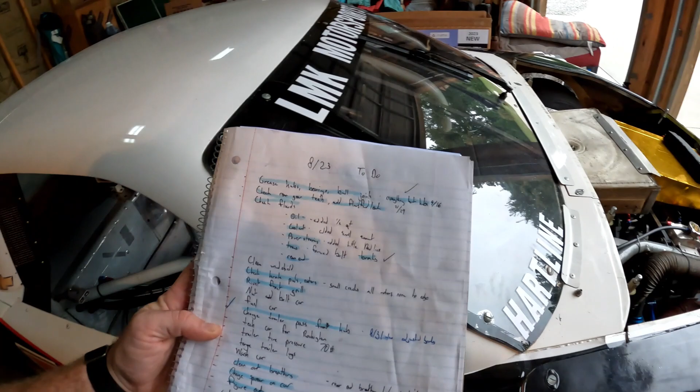Showcasing what I was talking about, getting the car ready to take it to Rockingham next month. Now, I usually keep a notebook of everything I want to do with the car—my honey-do list, my faults list. Anything I want to do to keep it in tip-top shape, or any issues I come across, I write down here. That way I don't forget about them, and I can just scratch them off whenever I get them done. So I'll run you through this list real quick.

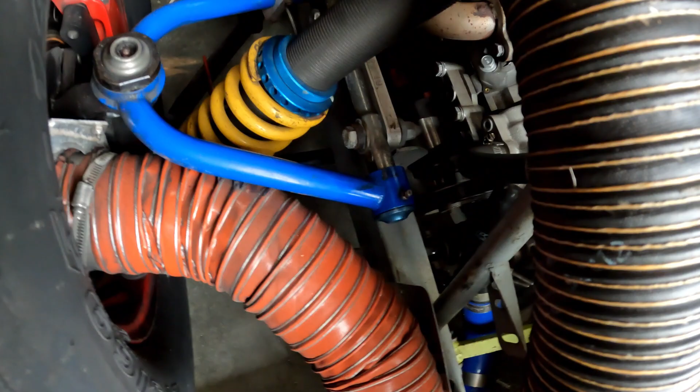Greasing hubs, bearings, everything like that—some of those I can show you. It has control arms, you can see the little grease points up there. So greasing all of those on both sides of the car, using Mobil 1 synthetic grease, putting it in there just till I see some of the old grease coming out, replacing it with new grease. Some other points underneath the car, the drive shaft, anything like that—just checking the whole car for grease points. Like I said, it's only a month old to me, so I'm still finding things, but as I come across them, I'm greasing them. Check the rear gear teeth, wanted to see what kind.

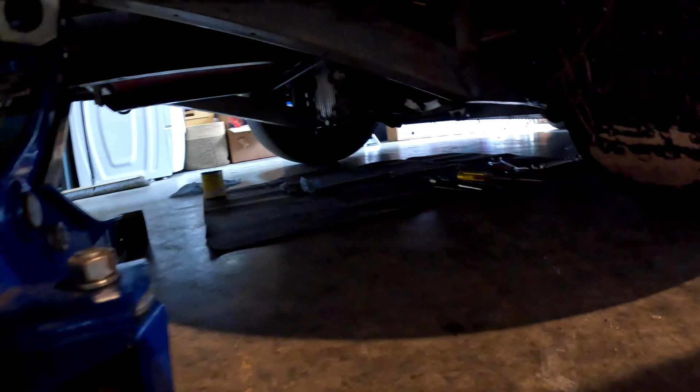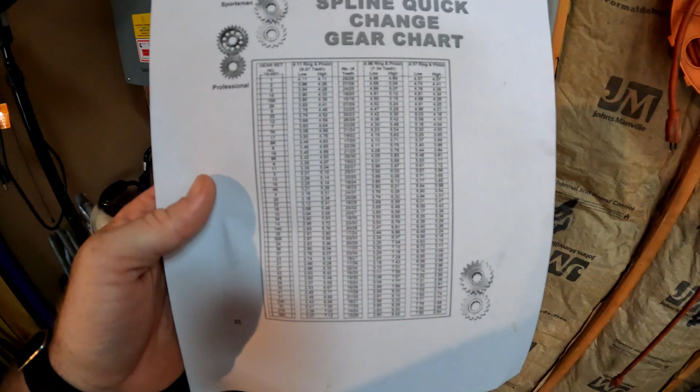Tiger has a sheet on their website where you can check your gearing depending on your ring and pinion. You can see your gear in there—this has a 21-29 gear set in it. You can change those out. Anybody familiar with the quick change rear gear will know that.

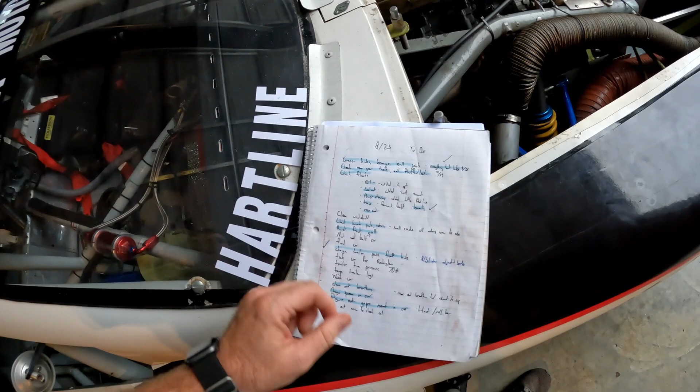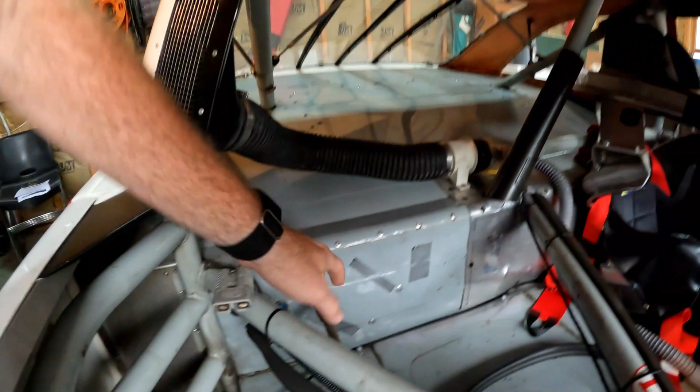Checking fluids, oil—that was kind of one of the things I noticed. The oil reservoir on this car is back there, behind the passenger side rear tire, kind of hard to get to. You measure the quantity by sticking a measuring tape down in there to see how much oil is in there—should be about 7 to 8 inches from the top. Really hard to get to. So one of the things I noticed, and put on my list, is cutting out an area to check the oil. I'm going to measure it out, cut a square, rivet a hinge and a latch to it. Then you'll just be able to pop that, take the top off the oil, and check it easier instead of taking the tire off and snaking something down in there.

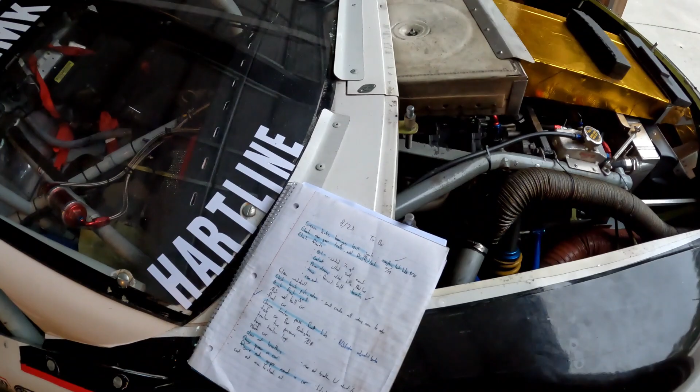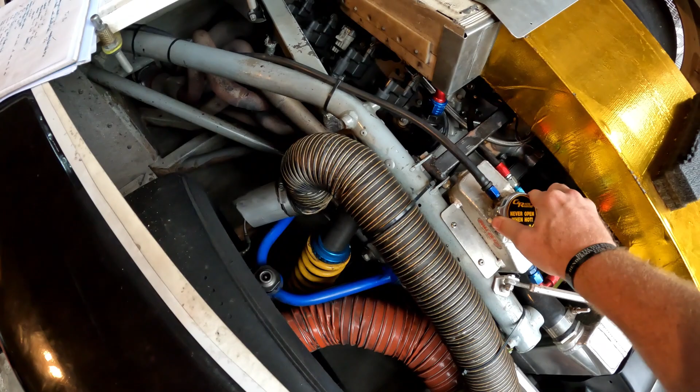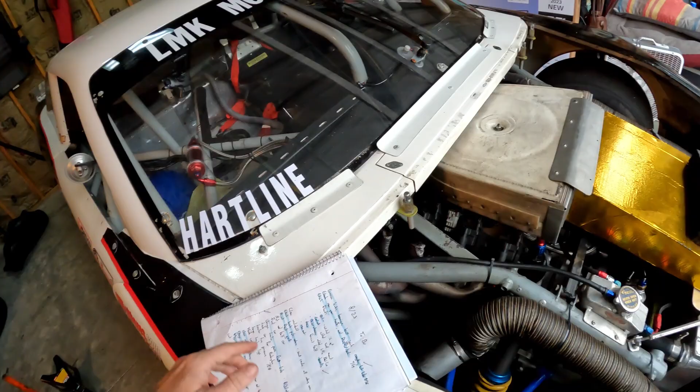Coolant, it's right here. When I add distilled water to it, here's your blow off—if it gets too hot, too much pressure, it'll vent it out there. Put this back on. That'll actually vent out right here by the windshield, so one, you can see it, and two, it's not going to put that water underneath your tire and reduce some of your traction.

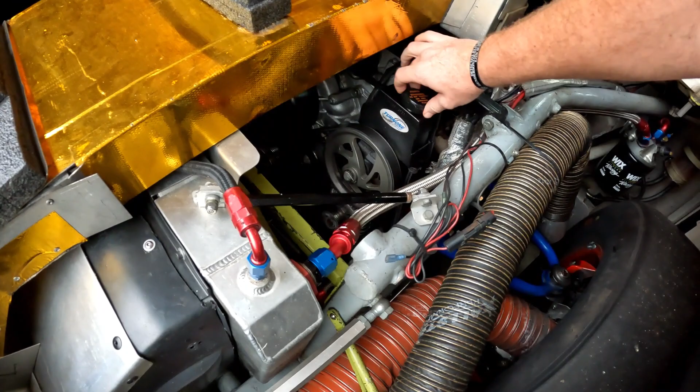Power steering, like I said earlier, has a Turn 1 power steering. Put some Redline in there, added just a little bit. It's really simple, just check your fluid level on there.

The trans has that Jerico. The car's not up off the ground anymore, but it has a fill bolt and a drain bolt—really simple, take the fill bolt out and you can check the level from there on the side of the transmission. Just kind of hard to get to up underneath the car since it sits really low to the ground. I got some of the weight taken off back there just so I could show you the rear end, but the tire is still on the ground—you can see how low it sits.

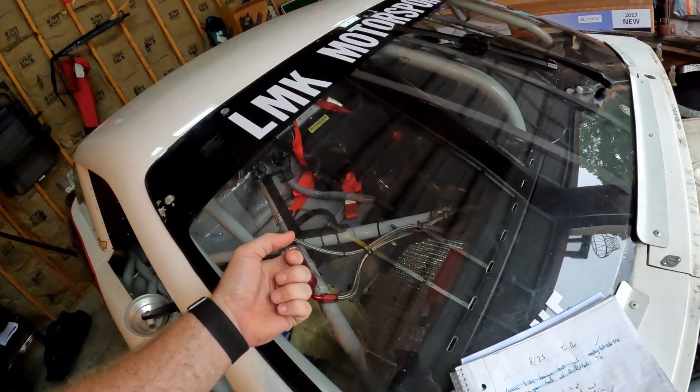And the rear end—clean the windshield, you'll notice that one's not checked off yet. This is plastic, not glass, so you can't put regular glass cleaner on it. I got some 5-star glass cleaner, plastic cleaner, windshield cleaner from the company that makes this. It's in the trailer, I'll show you that one.

Check all the brake pads and rotors—fairly simple, you take your wheels and tires off and check the rotors. They've got a little bit of cracking in them, that's normal from the heat. When the cracks get towards the edge of the rotor, that's when you want to replace them—don't want to have any failures. They've got tons of pads, so not worried about pads on that. Rivet the front grille.

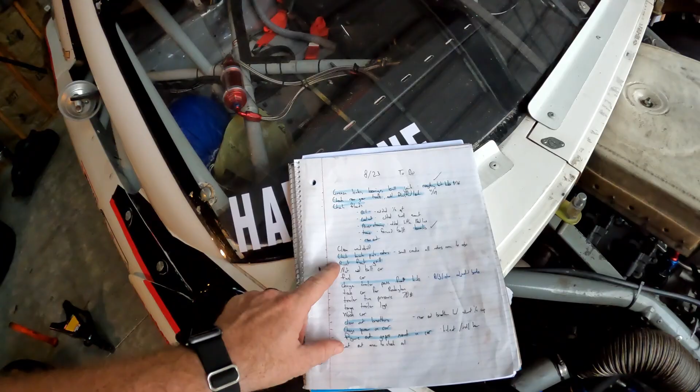Before I got it, this grill here, air intake goes down here, comes up on top of the motor. This rivet here had come off, so I just wanted to put a new rivet in there and hold that on. Pretty easy.

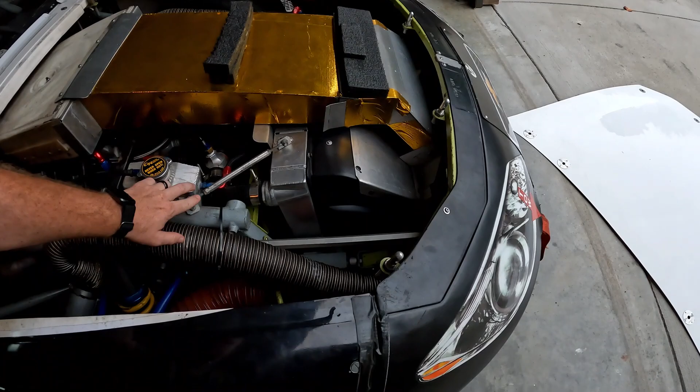Nut and bolt the car - that one's a new one to me. I mean, I always check over a car, but this is the first dedicated race car I've had. So what that means is going through and checking every fastener on the car, every nut and bolt you come across, checking them all to make sure they're nice and tight and torqued to spec. If you go underneath the car, there's several large ones on the frame.

All these body panels are held on by these quick releases. Want to go through and make sure they're all on. The windshield is held on by these - they got clips on the back of them, but rivets on the side windows. Everything has a fastener, so you want to take your time.

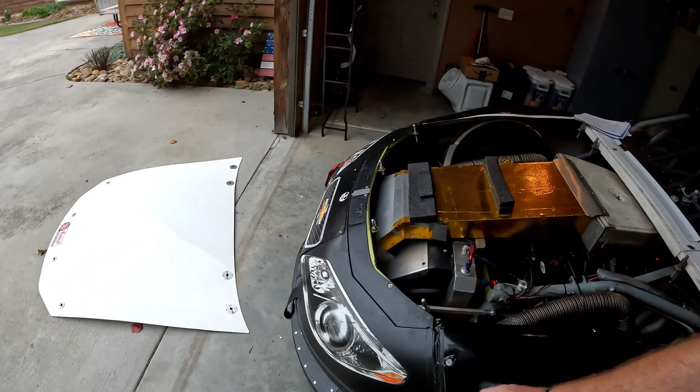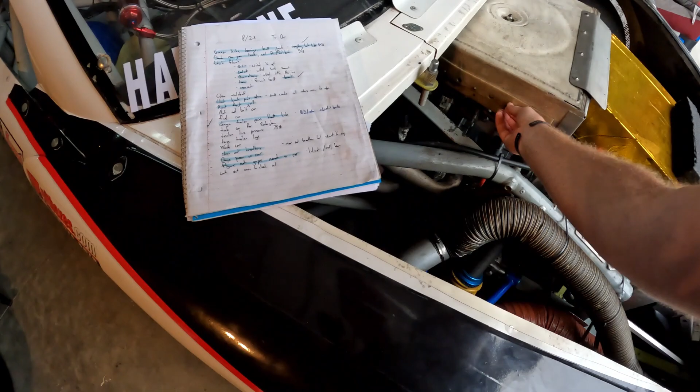If you'll notice, the reason I haven't checked that one off is just because there's so many. I tried to come up with a system going front to rear, top, and then work my way underneath the car when I had it up off the ground. But if you notice, it's not checked off because I want to make sure I didn't miss anything. I'm gonna have my son or somebody go back over it behind me just to make sure nothing's loose on it - there's so many bolts on this car.

Fuel in the car, I'm gonna do that a little closer to the track day so that it doesn't just sit with fuel sitting in it. I'll do that right before we leave, probably the weekend before. Then just, you know, everything.

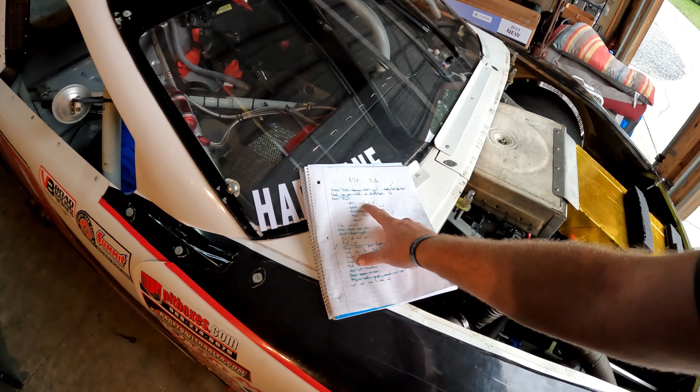Changing trailer front brake hubs - I had a bad hub on the trailer, so I replaced that out. Also, while I was there adjusted all the brakes, just write it down. The highlighter means I did it, and then if any notes, like here I added a half quart of oil, added a small amount of coolant - anything I do, that way I can go back and check it later and just kind of see what I did.

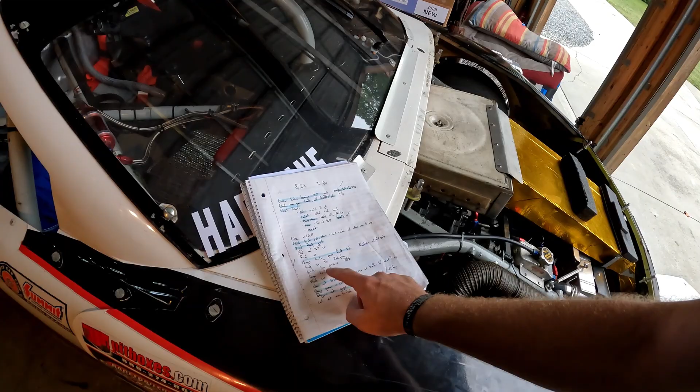Got to tech the car. They have a checklist for HPDE, a checklist tech inspection I got to do - trailer tire pressures, torque the lugs, all that kind of stuff.

Wash the car, I'm going to do that. It's kind of nasty outside today, if you can tell, raining, so I'm going to do that at a later day. I'll just get some soap and water and a hand towel and wash it by hand. It's a race car, it's not going to be pretty, but it can be a little cleaner. Wash it with soap and water before I use that plastic cleaner on it.

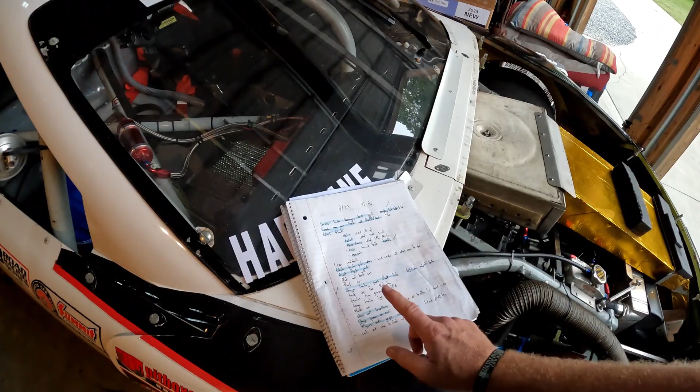Clean out the breathers - if you look, I'll see if I can show you real quick. Up underneath the rear of the car, let's get underneath here. You have breathers up underneath there - there's some for the oil, two running to the oil, and there's one on the far side for the differential and rear end. Those are very simple to clean out.

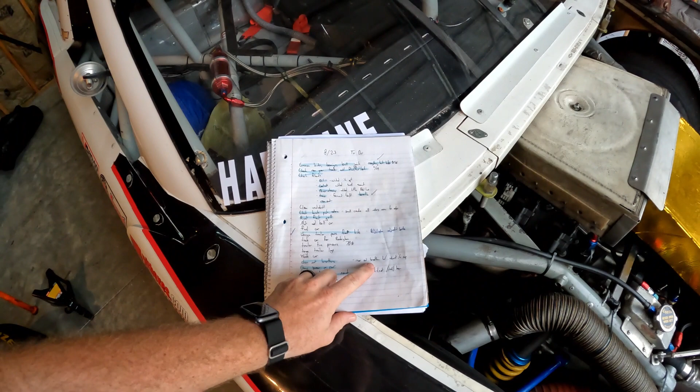They have a little knob on the bottom of them, you drain them out. And I think I put a note in here - yeah, clean out breathers. The rear end breather had about a quarter cup worth of fluid in it.

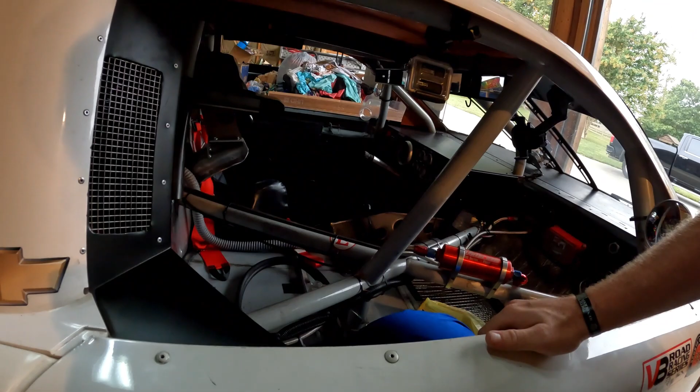Change sponsor - I put the Hartline on the windshield and on the back. Did all that. Mount a GoPro in the car - so these are just little things I wanted to do. I have one here for the cabin, showing the driver's position, and then there's one on the side of the seat over there.

I tried that one out with the GoPro 10 that I'm filming with, but it was at an angle. Didn't really like it - it was going to show the side of the seat there. So I put one on the side of the helmet and tried that out to see how it works.

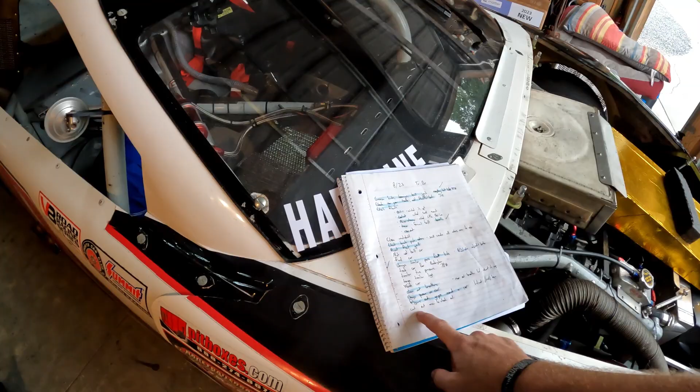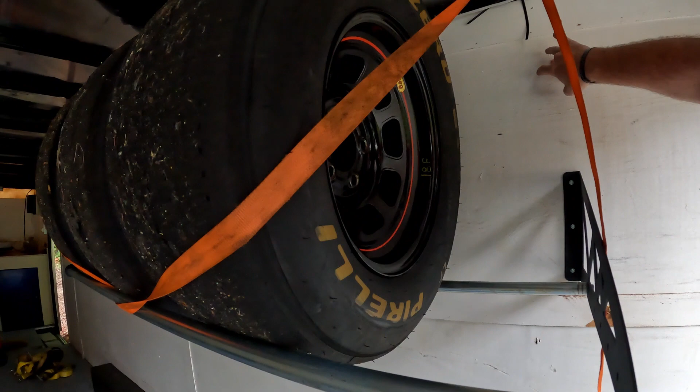Tire rack back here, can't quite hold 4. Have it mounted to the studs, the metal studs behind here. Don't quite trust it because it came with 3-inch bolts and can't exactly put 3-inch lag screws through the wall. It'll be on the outside of the trailer, so I've ratcheted it up to the metal on top of the trailer to give it a little extra support.

So far it's held up for me. Me and the wife put some garage flooring in the trailer over top of the plywood, just to kind of have the look and a little bit of durability to it. But those grippy tires, every time the car is riding on it, eats up the floor in here.

There's our straps to strap it down. You got D-rings in the floor we hook it to. There's some of the lumber we used to help load it. Some spare tools or spare parts. There's a drive shaft. Got stuff everywhere in the trailer. Canopy, fuel jugs, normal stuff.

Toolbox bolted to the trailer. It stays in here, it's got all the tools we need to work on everything if we need it. Generator, we take with us, it powers the trailer. Also the oil heater for the car, battery charger, whatever we need it for. It runs everything just fine.

Bottom of the toolbox here, let's see, got some grease for the wheel bearings, whatever else we may need, a drill, some pads. You put those underneath the car, just kind of check for leaks, see if anything's leaking. It's got some stains on the floor, so those help me see if anything fresh has leaked. Got a winch back here we use to load and unload the car.

Controllers over here on the other side. Right here, need to finish. It was on the inside of this. Need to finish mounting it up to where I can just get to it right there. This hangs there right now. Got a list of spare parts we have here.

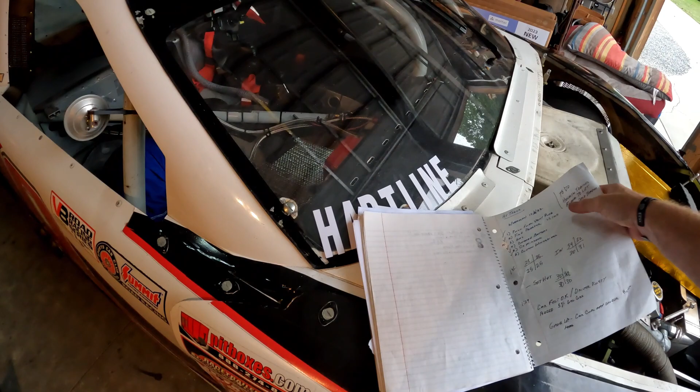Check the oil, so not much. And then when you go to the track, there'll be a checklist, you know, setting tire pressures, everything, pulling the fuel vents. I have a checklist on the side of the door of the trailer too, just to make sure we don't forget anything, because there are so many little things with the car. I want to make sure we don't forget anything.

I'm sure I am missing something. Like I said, I've owned it for a month, so it's a growing process, gonna learn it as I go. If you guys know the car or know anything about them, if I'm missing anything, please don't hesitate to let me know. I appreciate any help, and hope to show you some things. Thank you.